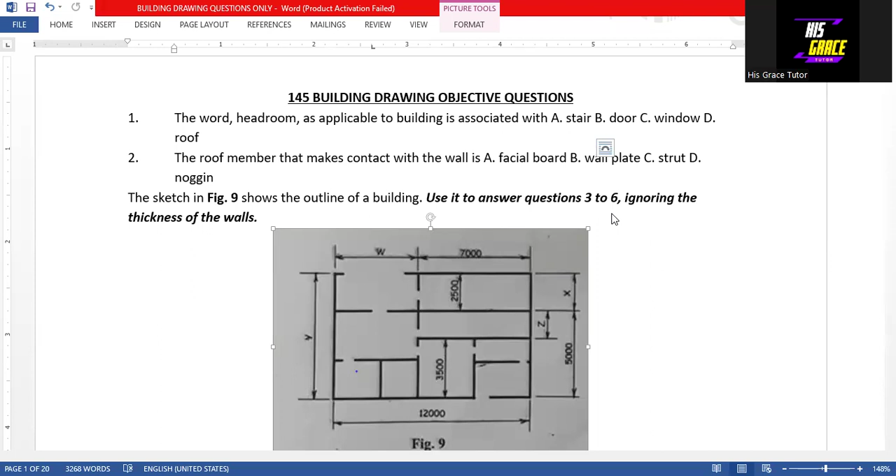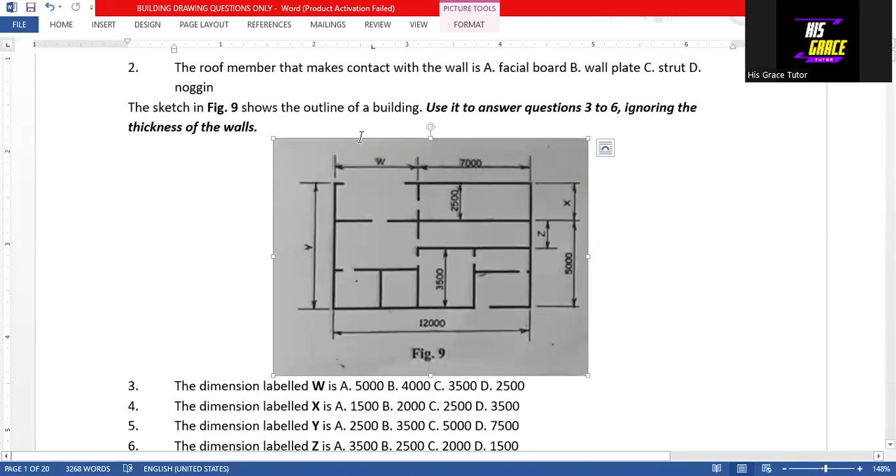We have to use this diagram to answer questions 3 to 6, as we are told the sketch in figure 9 shows the outline of a building. Use it to answer questions 3 to 6, and ignore the thickness of the wall. Let's start with question 3.

Question 3 says that dimension label W is... so we have W here, and the total length is 12,000, and from here to here is 7,000. If we subtract 7,000 from 12,000, the answer is 5,000. So option A is the answer to question 3.

Question 4 says that the dimension label X is... so here we have X. From here to here we have 5,000, and from here to here we have 2,500. So X is 2,500. Option C is the answer to question 4.

Question 5 says that the dimension label Y is... this is Y from here to here. If from here to here is 5,000, and for X it's 2,500, then dimension label Y is 7,500. So option D is the answer to question 5.

Question 6, dimension label Z is... this is Z from here to here. Looking at the total distance, as we have that Y is 7,500, for the distance from here to here we subtract: from here to here is 3,500 plus 2,500, which gives us 6,000. If we subtract 6,000 from 7,500, the total distance which is the length of Y, that gives us 1,500. So option D is the answer to question 6.

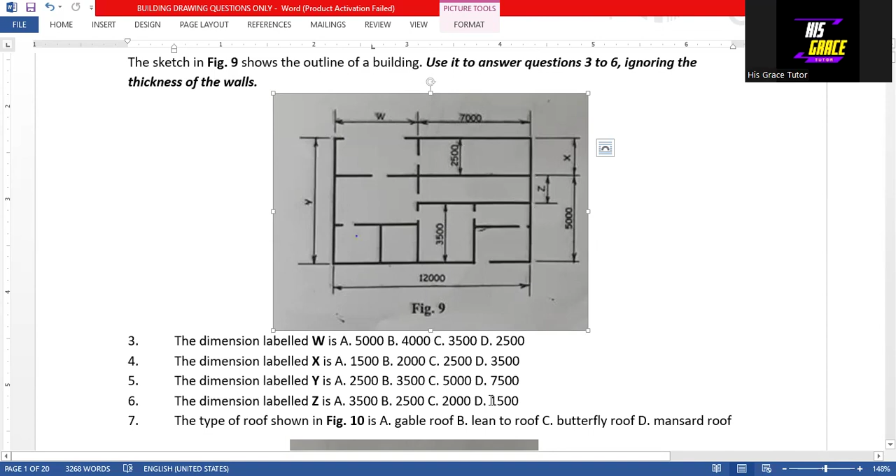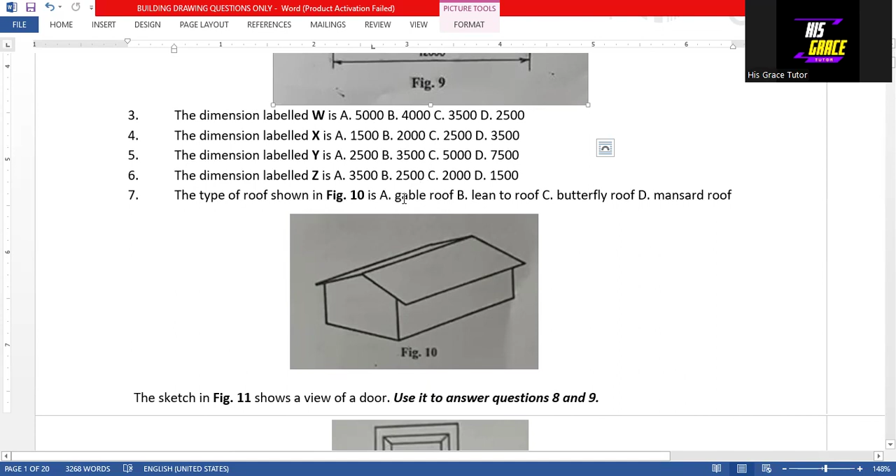Question 7 says that the type of roof shown in figure 10 is a gable roof. So option A is the answer to question 7. Gable roof is the answer. This is a gable roof, so option A is the answer to question 7.

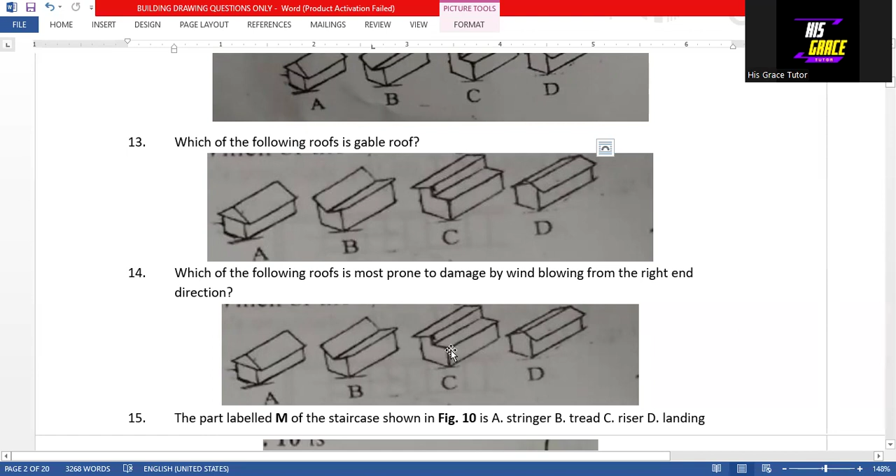Question 14 says that which of the following roofs is most prone to damage by wind blowing from the right end direction? So option C is the answer to the question. This particular roof will be affected by the wind blowing from the right direction.

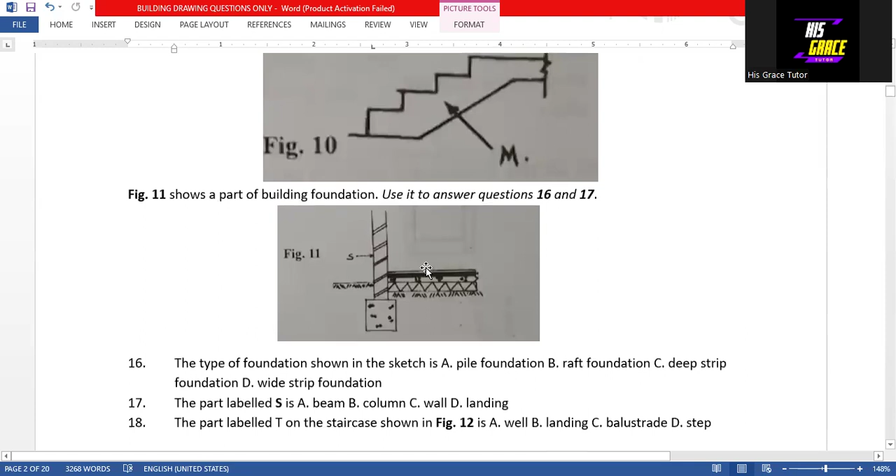Questions 16 to 17 use this diagram. Question 16 asks the type of foundation shown in the sketch, which is a deep strip foundation. That is option C.

Question 17: the part labeled S is a wall. That is option C, the answer to question 17.

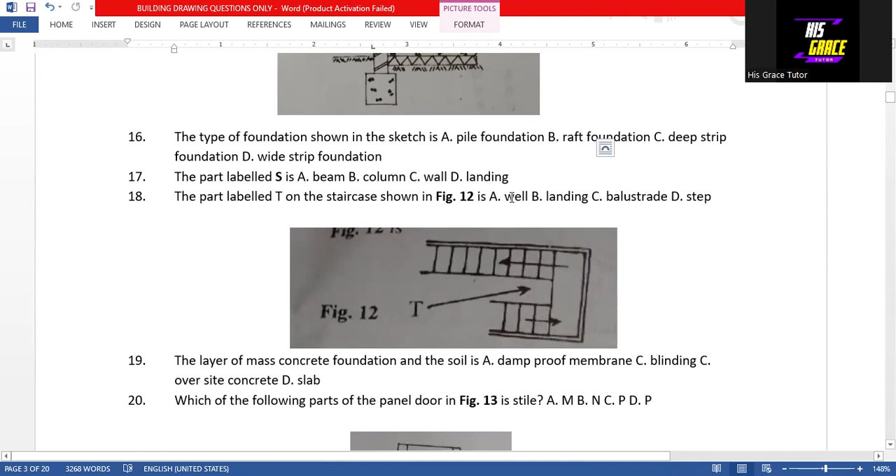Question 18: the part labeled T on the staircase shown in figure 12 is a well. That is option A, the answer to question 18. This part of the staircase is called a well.

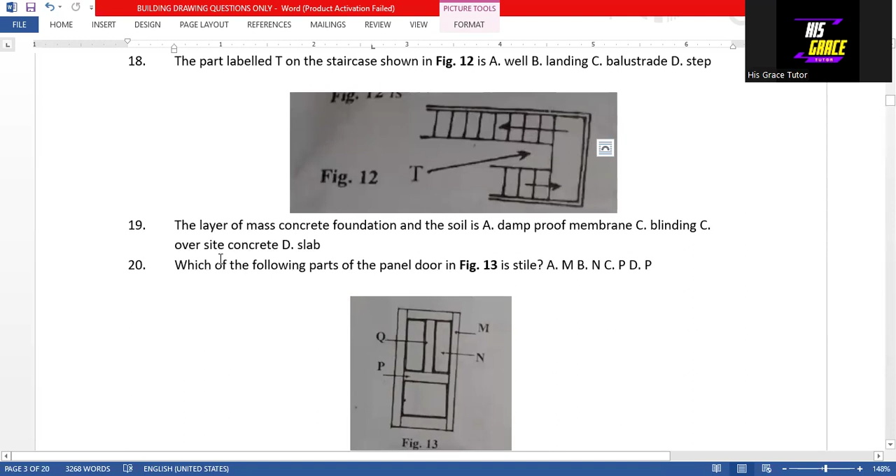Question 19: the layer of mass concrete for foundation and the soil is over site concrete. That is option C, the answer to question 19.

Question 20 asks which part of the panel door in figure 13 is a stile. Looking at this question, the answer is M is a stile. This part is known as a stile, part of a door.

Question 22: the material used to construct the door labeled K is wood. That is option A, the answer to question 22.

Question 23: in first angle orthographic projection, the view of the building in direction of RP is a front elevation. That is option C, the answer to question 23.

Question 24: which of the following symbols represents outcome? The answer is option A.

Question 25: the tool shown in figure 15 is called a trowel, or hand trowel. So option D is the answer to question 25.

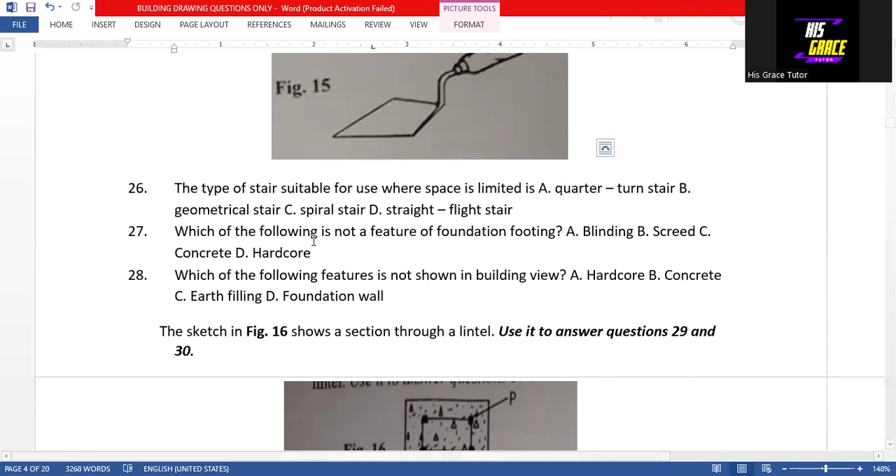Question 27 asks which of the following is not a feature of foundation footing. The answer is option B, screed.

Question 28 asks which of the following features is not shown in building view. The answer is option D, the foundation wall, which is not shown in building view.

Questions 29 to 30 use this diagram. Question 29: the purpose of the protruded rods labeled P is to provide reinforcement of the lintel. That is option B, the answer to question 29.

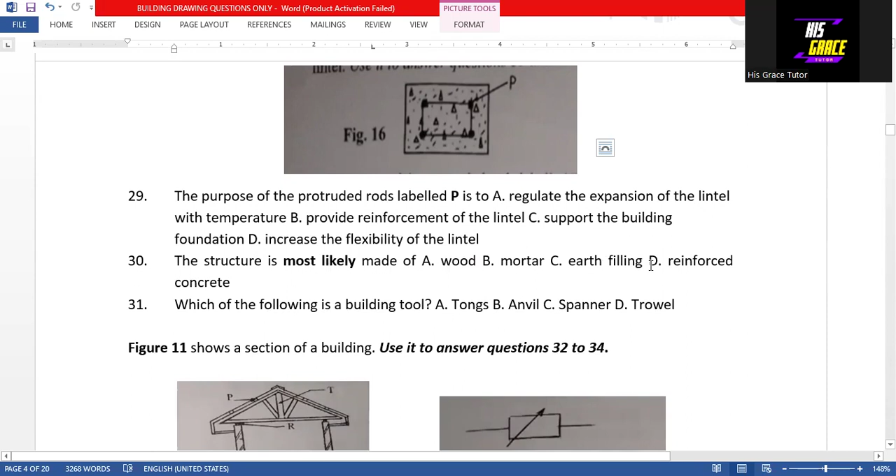Question 30: the structure is most likely made of reinforced concrete. That is option D, the answer to question 30.

Question 31 asks which of the following is a building tool. A building tool is a hand trowel or trowel. That is option D, the answer to question 31.

Questions 32 to 34 use this diagram. Question 32: the part labeled R is a wall plate. Option D is the answer to question 32.

Question 33: the part labeled T is a king post. So option C is the answer to question 33.

Question 34: the main function of the part labeled P is to support the roofing sheet. That is option C, the answer to question 34.

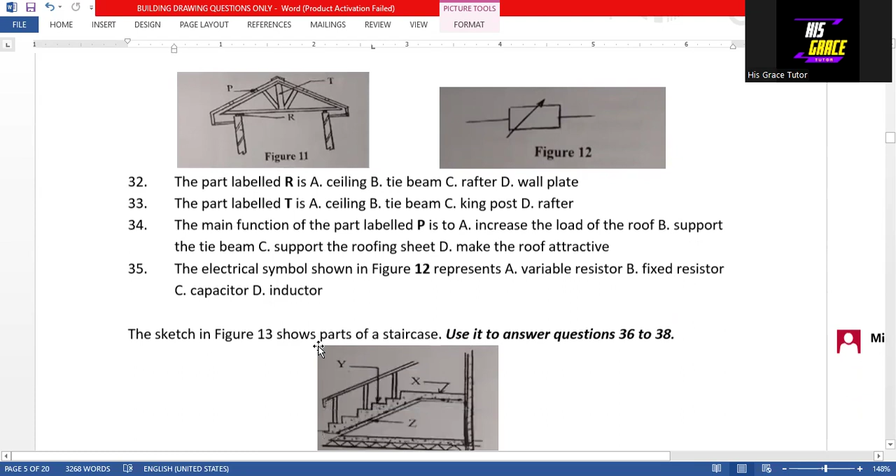Question 35: the electrical symbol shown in figure 12 is a variable resistor. Option A is the answer to question 35, referring to this diagram.

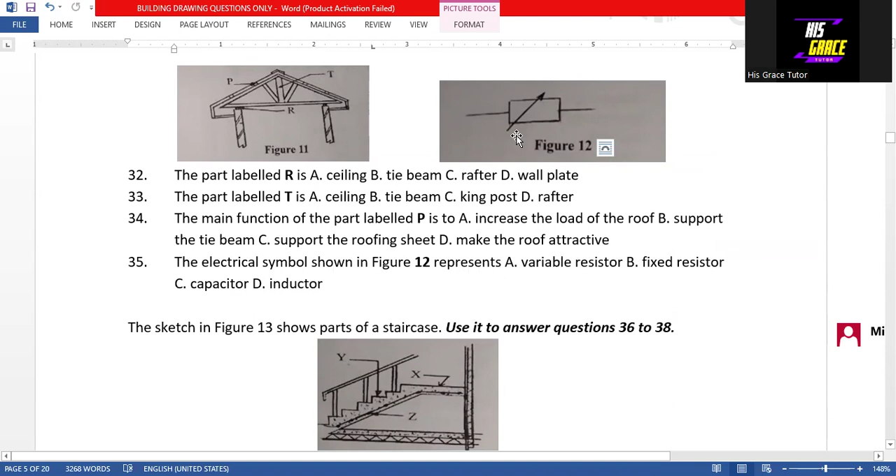Questions 36 to 38 use this diagram. Question 36: the part labeled X is a landing. That is option A, the answer to question 36.

Question 37, the part labeled Y is a tread. Option C is the answer to question 37.

Question 38, the function of the part labeled Z is to enhance tensile strength of the stair. So the answer is option B to question 38.

Question 39 asks which of the following symbols represents a single sink. The answer is option D to question 39.

Question 40 asks which of the following symbols conventionally represents a wall lamp. The answer is option C to question 40.

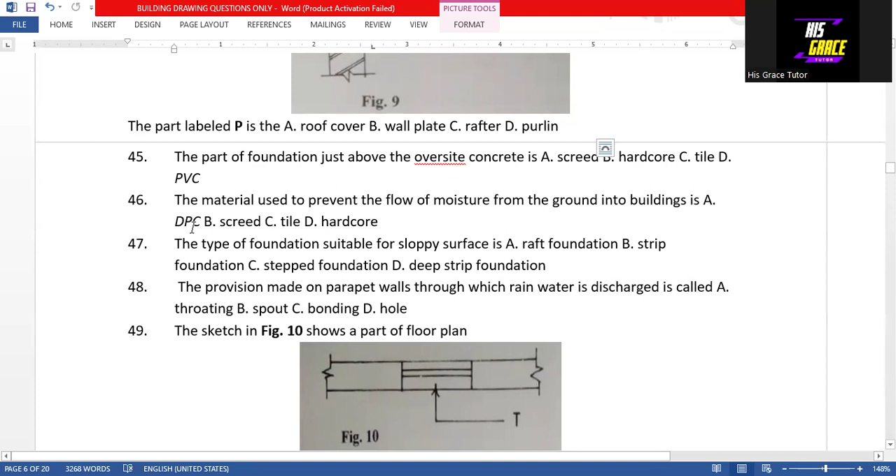Question 47, the type of foundation suitable for a sloping surface is a stepped foundation. Option C is the answer to question 47.

Question 48 says the provision made on parapet walls through which rainwater is discharged is called throating. Option A is the answer to question 48.

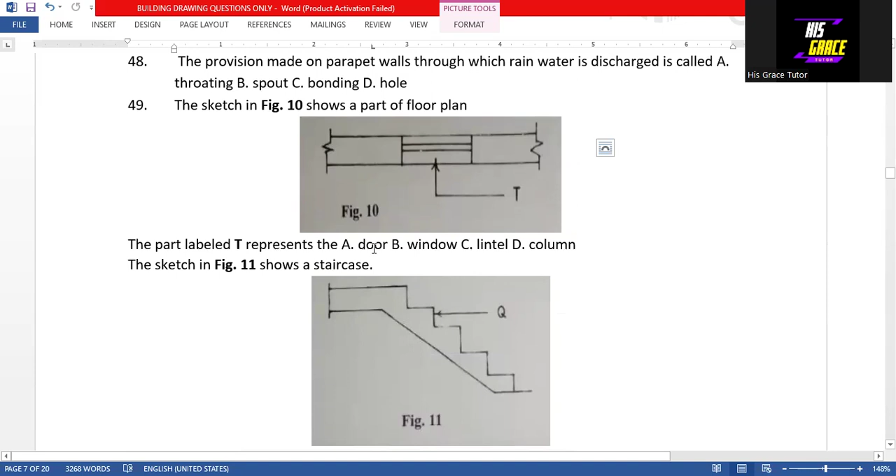Question 49, using this diagram, the part labeled T is a window. Option B is the answer to question 49.

Question 50, the part labeled Q is a riser. Option D is the answer to question 50.

Questions 51 and 52 use this diagram. Question 51 says the type of stair shown on the sketch is a straight flight stair. Option D is the answer to question 51.

Question 52, the part labeled C is a handrail. Option C is the answer to question 52.

Question 53 asks which of the following building material symbols represents hardcore. The answer is option A. We have done something like this before.

Question 55, the type of roof on the building is a gable roof. Option C is also the answer to question 55.

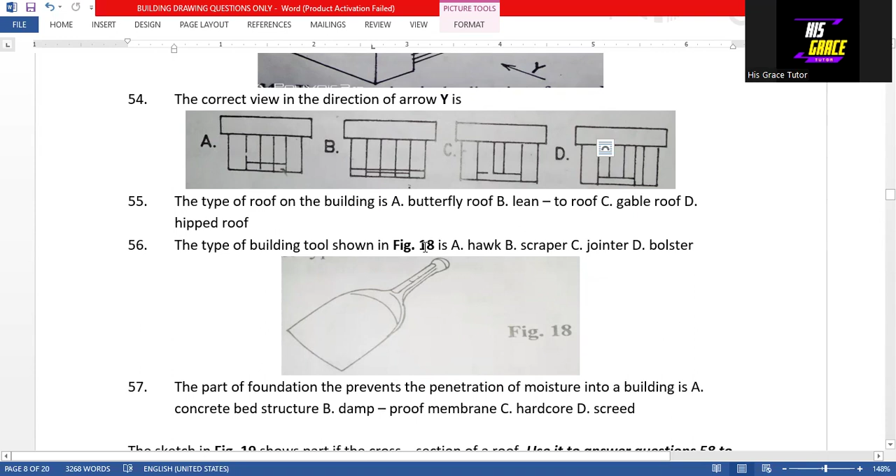Question 56, the type of building tool shown in figure 18 is a bolster. Option D is the answer to question 56.

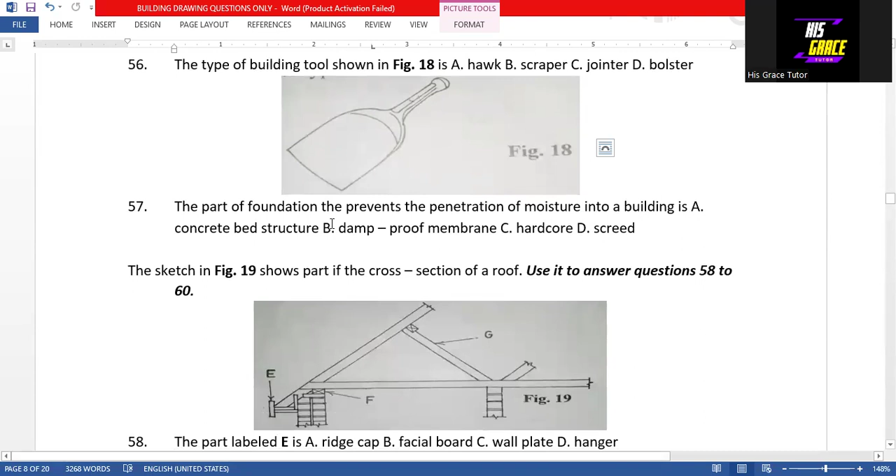Question 57, the part of the foundation that prevents penetration of moisture into a building is a damp-proof membrane, or we call it damp-proof course. Option B is the answer to question 57.

We use this diagram to answer questions 58 to 60. Question 58, the part labeled E is a fascia board, option B. Question 59, the part labeled G is a strut.

Option A is the answer to question 59. Question 60, the part labeled F is a wall plate. Option D is the answer to question 60.

We use this diagram to answer questions 61 and 62. Question 61 says the part labeled Q in the figure is the mullion. Option C is the answer to question 61.

Question 62, the part labeled T in the figure is a stile. Option D is the answer to question 62.

Question 63, which of the following tools is classified under impelling tools? The answer is option C, chisel is an impelling tool. We use it to shape the wood.

We have to make use of this diagram to answer questions 64 to 65. Question 64 asks which labeled part is a ridge. F is the answer, that's option D. Question 65 says the part labeled K is a collar, that is option C.

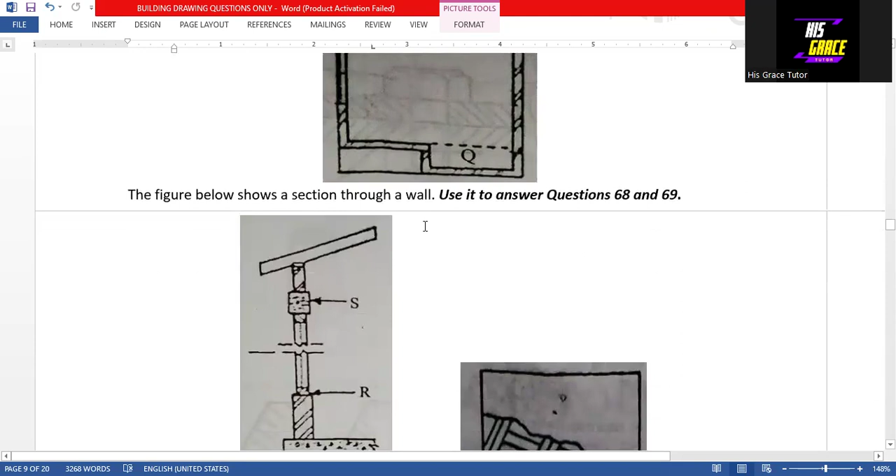Question 70 says that the conventional symbol shown above represents earth. Option C is the answer to question 70.

Question 71, how many flights has the staircase shown below? Looking at this, it's just a one flight staircase, so option A is the answer to question 71.

Question 72, which of the following is not a type of door? The answer is jamb, that is option C is the answer to question 72.

Question 73, the electrical symbol shown above is a signal lamp. That is option B is the answer to question 73.

We have to use this diagram to answer questions 74 to 76. Question 74 says the part labeled K is a balustrade, so the answer is option B.

Question 75, the part labeled P is made of wood. That's option C, the answer to question 75.

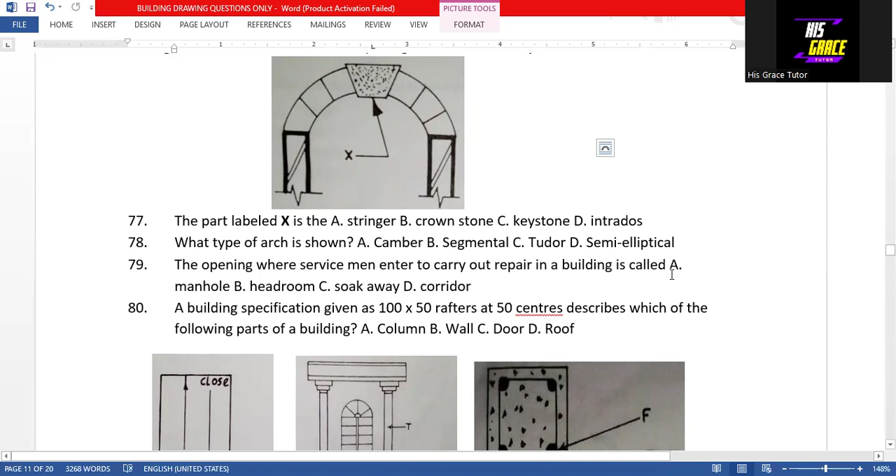Question 80, a building specification given as 100 by 50 rafters at 50 centers describes which part of the building? That is roof, so option D is the answer to question 80.

Question 81 says the type of door which is closed and opened vertically as shown in figure 18 is a roller shutter door. That is option A is the answer to question 81.

We make use of this diagram, figure 19, to answer questions 82 to 83. Question 82, the type of door shown is a flush door. Option D is the answer to that question.

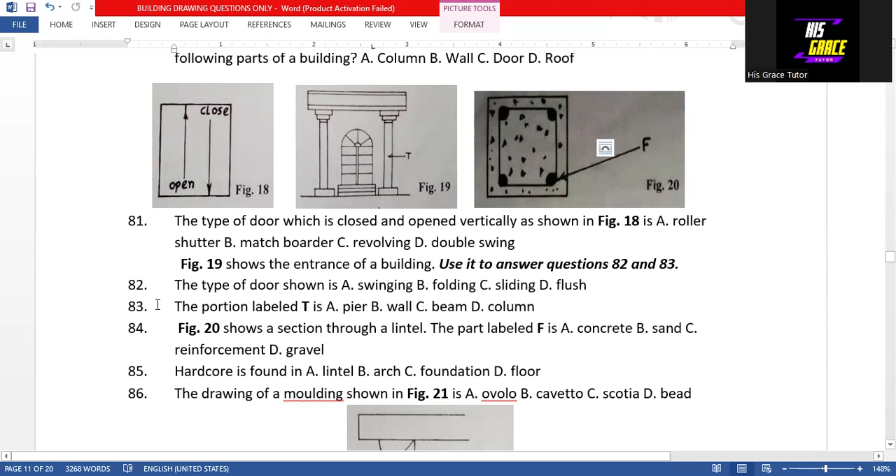Question 83, the portion labeled T is a column. That is option D is the answer to question 83.

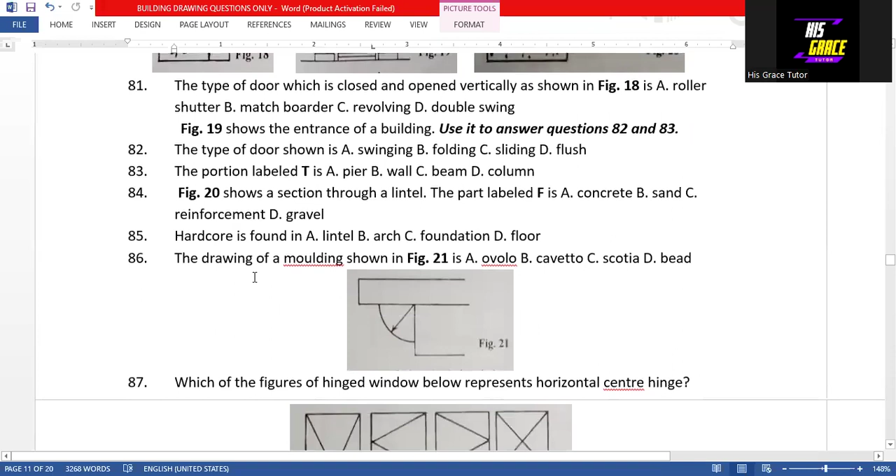Question 84 uses this diagram, figure 20, which shows a section through a lintel. The part labeled F is a reinforcement. That is option C is the answer to question 84.

Question 85, hardcore is found in the floor. Looking at the specifications of the building drawing, it's part of the floor.

Question 86, the drawing of a molding shown in figure 21 is as follows.

Option A is the answer to question 86.

Question 87: Which of the figures of hinge window below represent horizontal center hinge? Option D is the answer to question 87.

We make use of this diagram to answer questions 88 to 90. Question 88 says the part labeled V is a soffit board, that's option A. Question 89 asks what the roof members S and T respectively are - they are the ridge board and ceiling joist, that is option B, answer to question 89.

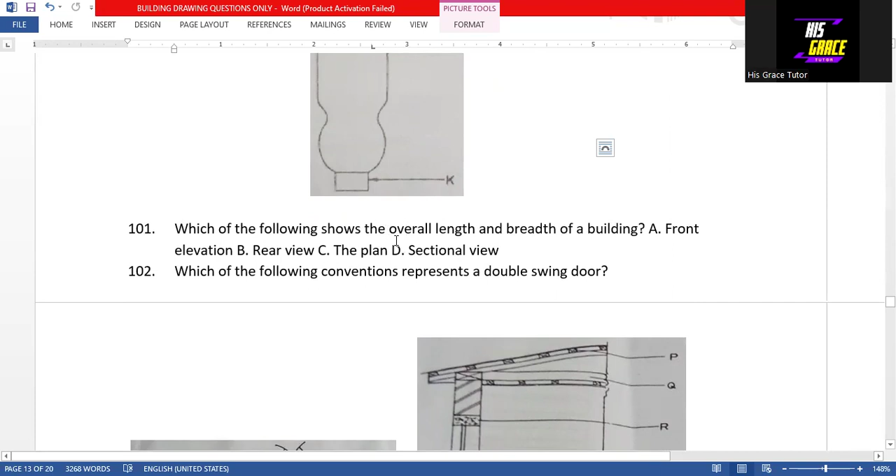Question 101: Which of the following shows the overall length and breadth of a building? That is the building plan, option C is the answer to question 101.

Question 102: Which of the following conventions represent a double swing door? That is option A is the answer to that question.

We make use of this diagram to answer questions 103 to 106. Question 103: the part labeled P shows a purlin. That is option B is the answer to question 103.

Question 104: the portion labeled R is located directly on top of a window, that's a lintel. Option C is the answer to question 104.

Question 105: the portion S is a floor finish. That is option B is the answer to that question.

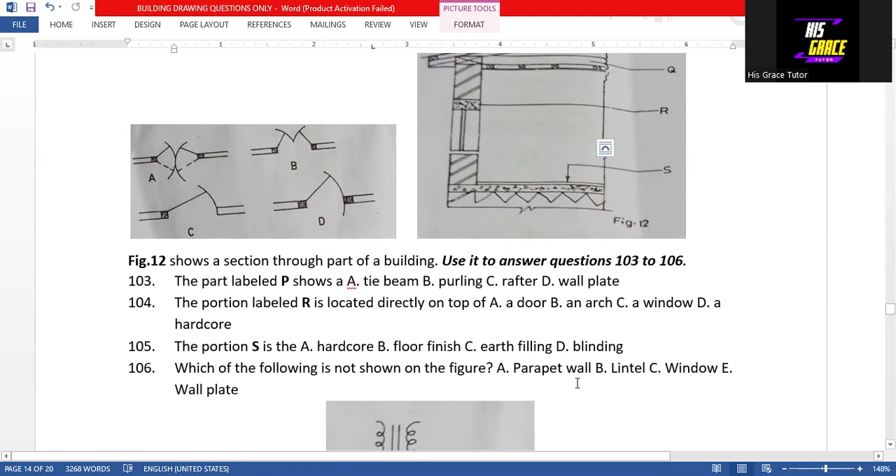Question 106: Which of the following is not shown on the figure? Looking at what we have here, parapet wall is not shown on the figure. Option A is the answer to question 106.

Question 108: Which of the following parts of a building has both tread and riser? That is staircase. Option C is the answer to question 108.

Question 109: a door made of steel is represented by which of the following symbols? The answer to question 109 is option D.

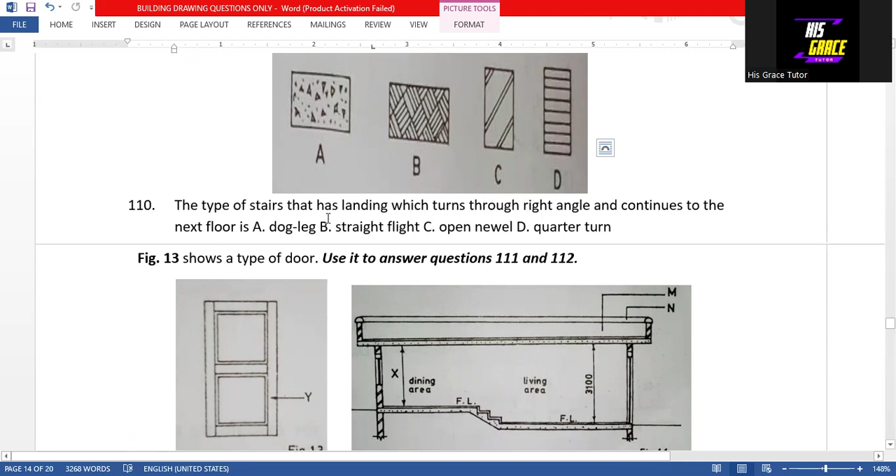Question 110: the type of stairs that has a landing which turns through a right angle and continues to the next floor. The answer is option A, that is dog leg stairs. We are making use of this diagram.

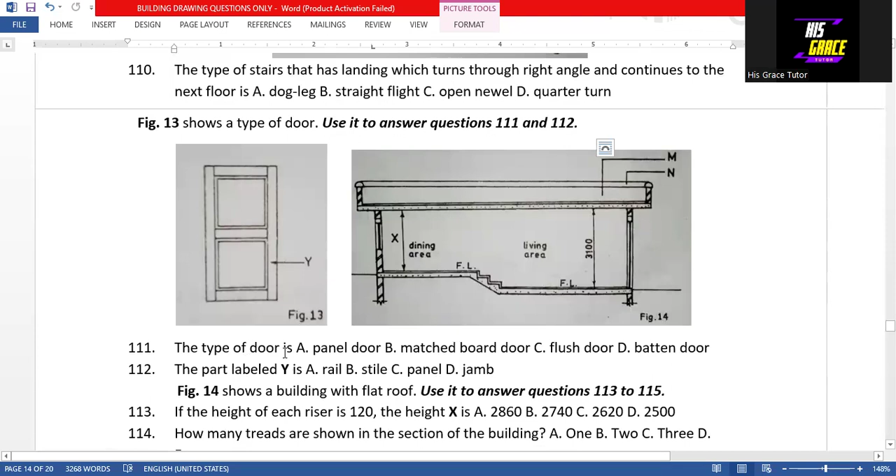To answer question 111 to 112: the type of door shown is a panel door, that is option A. The part labeled Y is a stile, that is option B, the answer to question 112.

We use this diagram to answer question 113 to 115. Question 113: if the height of each riser is 120, the height X is found by multiplying 3 risers times 120, giving 360. Then we subtract 360 from 3,100, giving 2,740. That makes the answer to question 113 option B.

Then, how many treads are shown in the section of the building? We have 2 treads, that is the surface here and the surface here. So the answer is option B to question 114.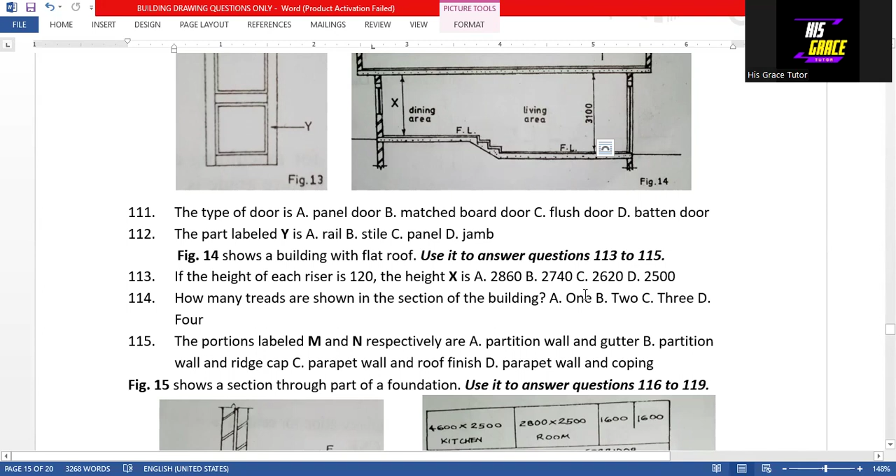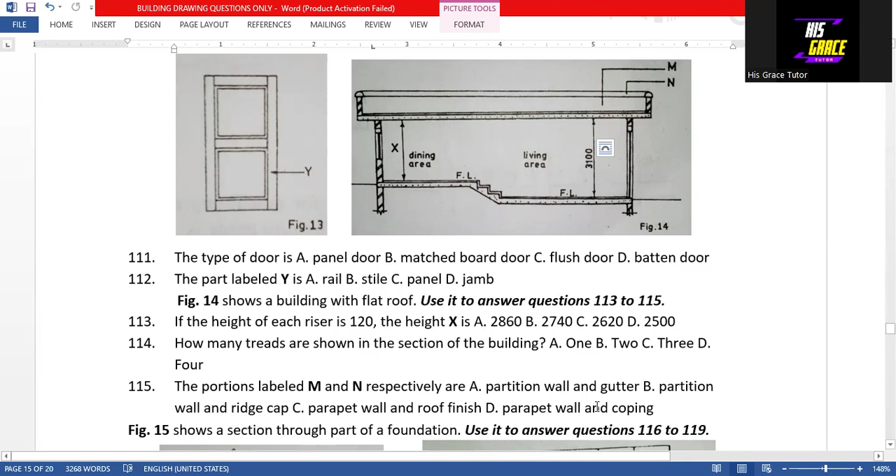Question 115 says the portions labeled M and N respectively are: M is parapet wall, while N is coping. So option D is the answer to question 115.

We are making use of this diagram to answer question 116 to 119. Question 116: the type of wall shown is a cavity wall, that's option C. The part labeled F is a skirt, that is option A.

The part labeled G, question 118, is DPC, damp proof course.

Question 119, in figure 16: if the block is 225, the length Y is found by summing the lengths from here to here.

So we sum 4,600 plus 2,800 plus 1,600 plus 1,600, and that amounts to option A, 10,600, the answer to question 119.

Then on a building drawing, FL is used to represent floor line or floor level.

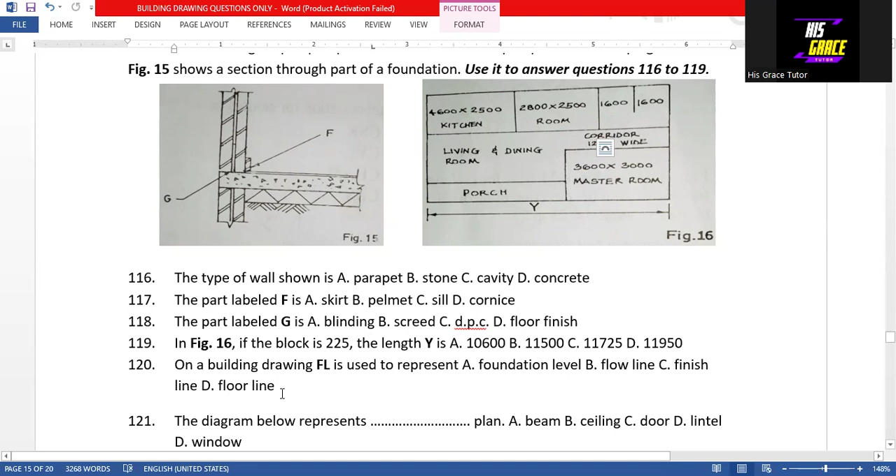Question 121 says the diagram below represents a dash plan. It represents a window plan.

Question 122: the recommended size of door for a toilet opening is 750.

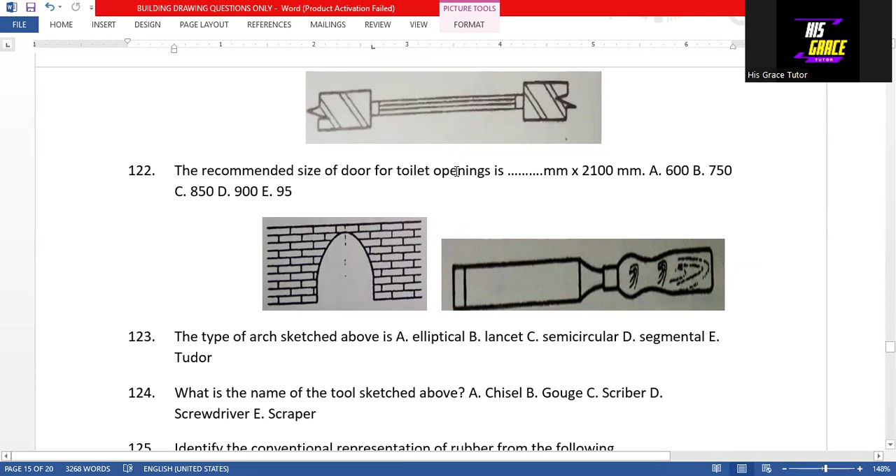Question 123: the type of arch sketched above is a lancet arc, that is option B, the answer to question 123.

Question 124: what's the name of the tool sketched above? The answer is a chisel, option A.

Question 125: identify the conventional representation of rubber from the following. The answer is option E.

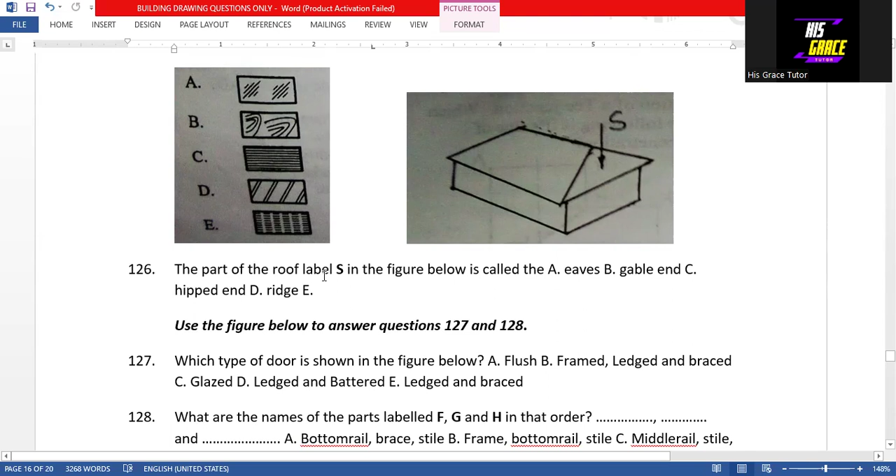Question 126: the part of the roof labeled S is hip end, that is option C, the answer to question 126.

Question 127: which type of door is shown in the figure below? The type of door shown is option B, a framed, ledged, and braced door.

Question 128: what are the names of the parts labeled F, G, and H? The answer is option A. F is bottom rail, G is brace, and H is stile. Option A is the answer to question 128.

Question 129 asks which symbol represents glass. Using this diagram, this represents glass, so the answer is option B.

Question 130 asks about the roof shown in the figure below. This roof is the lean-to roof, so option B is the answer to question 130.

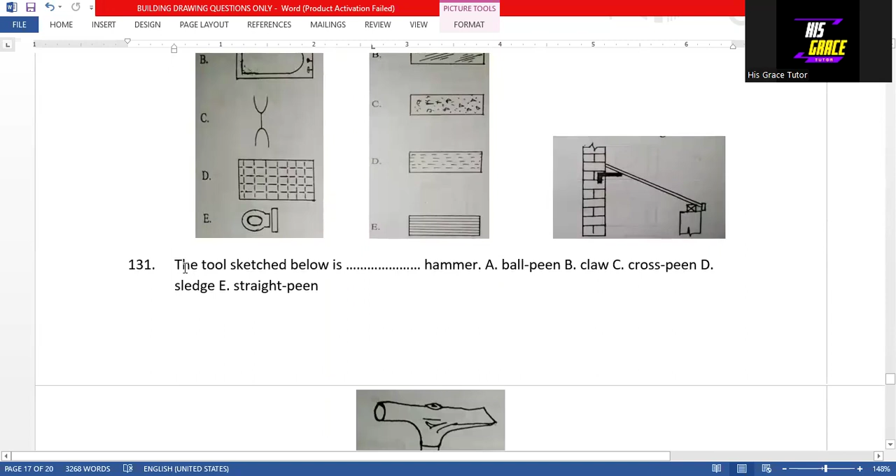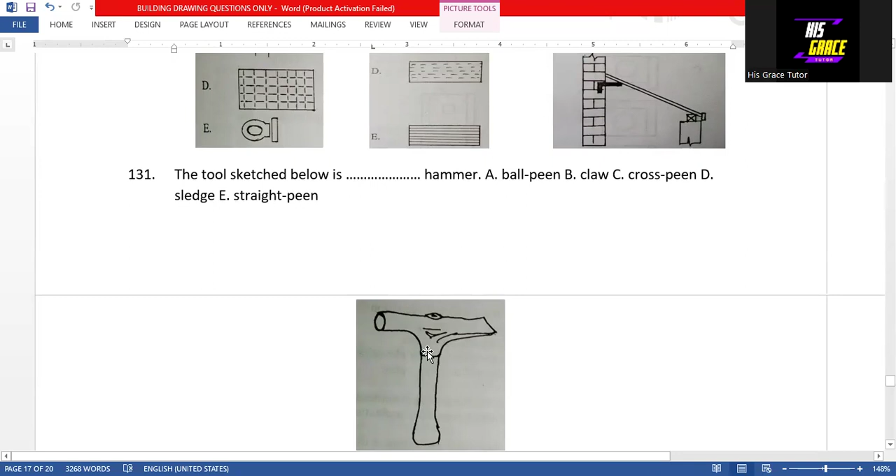Question 131: the tool sketched below is a cross-peen hammer. So option C is the answer for question 131.

We make use of this diagram to answer questions 132 to 134. Question 132 asks which of the following letters represents the roofing sheet. The answer is option D, letter M, representing the roofing sheet.

Question 133: the wall plate is represented by letter O, so option A is the answer to question 133.

Question 134 asks which symbol represents water. Option D is the answer to question 134.

Question 135: the figure shown above can be identified as a marking gauge. Option A is the answer to question 135.

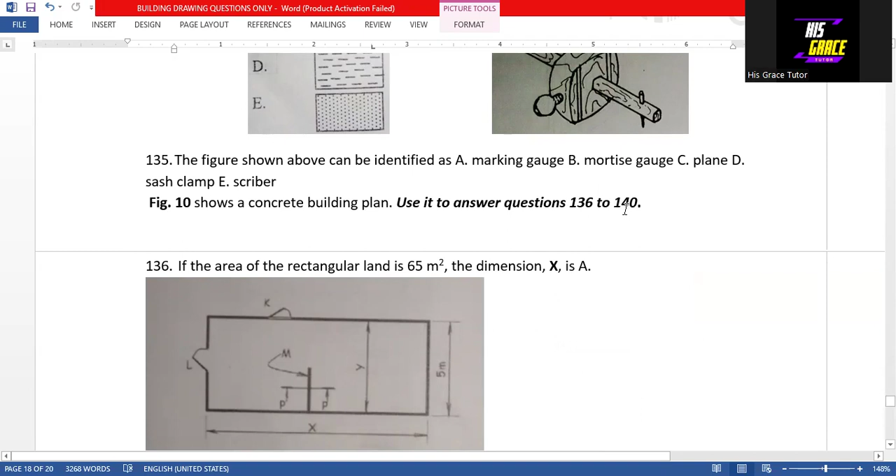We use this diagram to answer questions 136 to 140. Question 136 asks that if the area of the rectangular land is 65 meters square, what is dimension X? This is dimension X here.

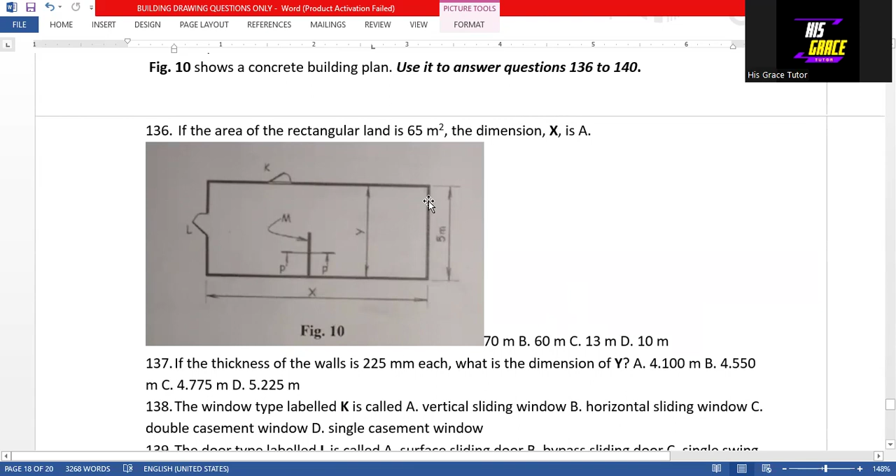If the area is 65 meters square and the width is 5 meters, then length X will be 13 meters, since 65 divided by 5 gives 13. So option C is the answer to question 136.

Question 137 asks that if the thickness of the wall is 225 millimeters each, what is dimension Y?

Here we have 225 millimeters, times 2. Let me use my calculator. 225 times 2 gives 450. Then we subtract 450 from 5 meters.

If we divide 450 by 1,000 to convert it to meters, that gives us 0.45. Then subtracting, 5 minus 0.45 gives us 4.55. So the answer is option B for that question.

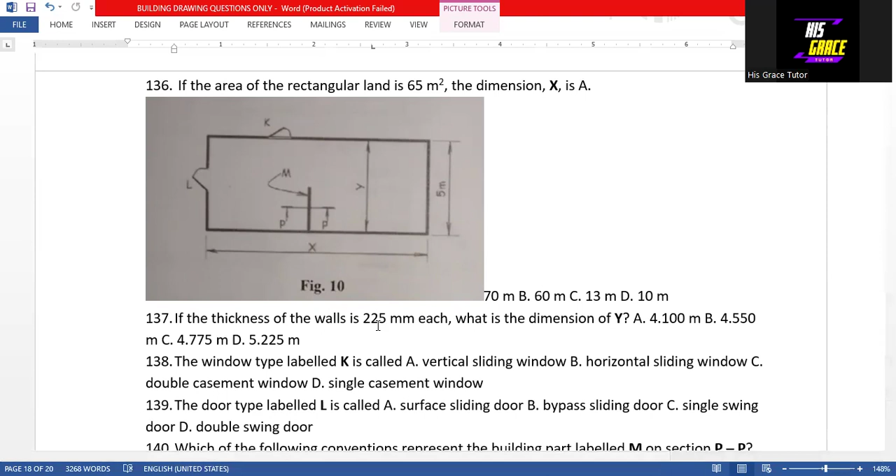So distance Y is 4.55. To summarize: we multiply 225 by 2 for the thickness of the wall, giving 450. We divide 450 by 1,000 to convert it to meters, then subtract 0.45 from 5, which gives 4.55. So the answer is 4.55 for length Y.

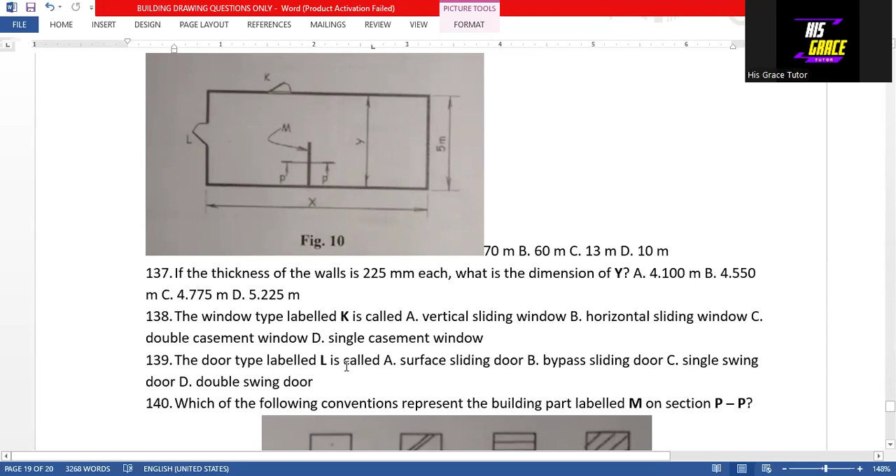Question 138: the window type labeled K is a single casement window, that's option D. Question 139: the door type labeled L is a single swing door.

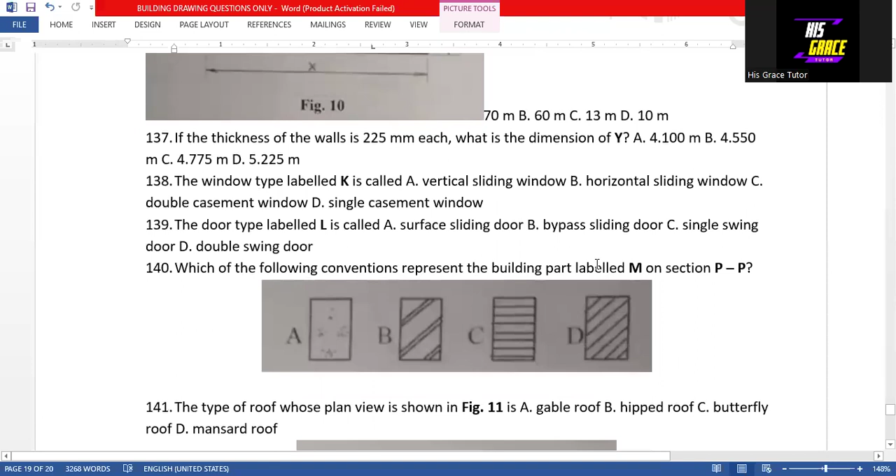That is option C is the answer to question 139. Question 140 asks which convention represents the building part labeled M on section PP. Building part label M is a wall, so the answer is option B.

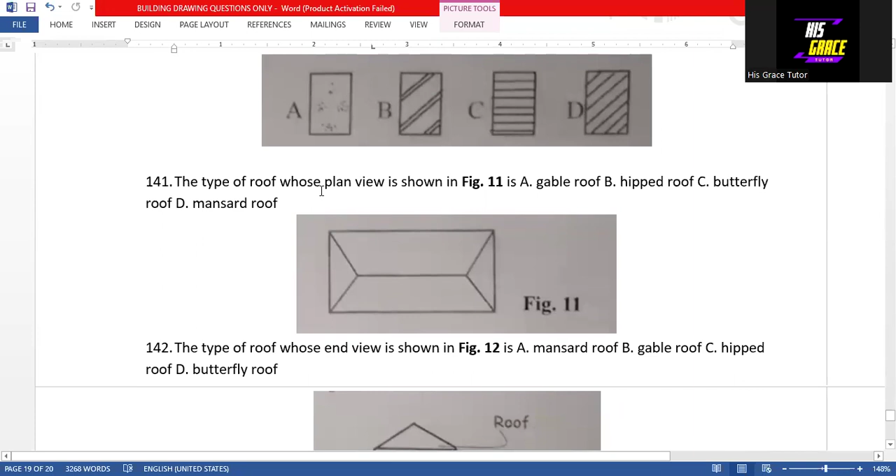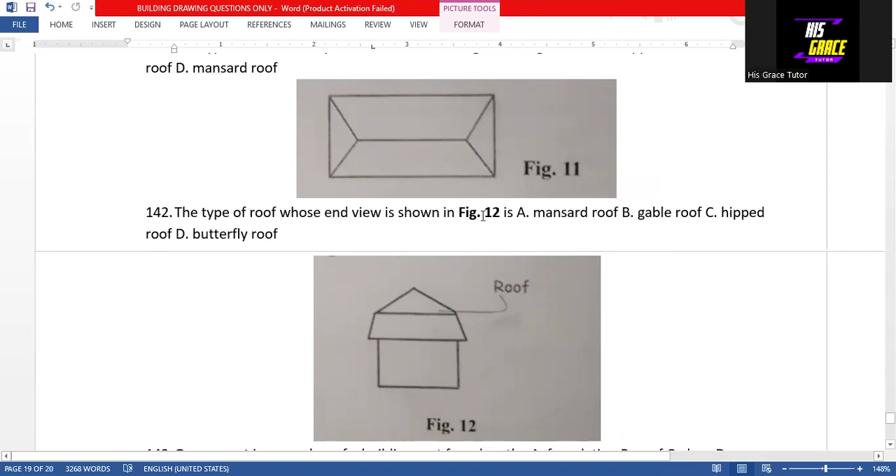Question 141: the type of roof whose plan is shown is a hip roof, option B is the answer. Question 142: the type of roof whose end view is shown is a mansard roof, option A is the answer.

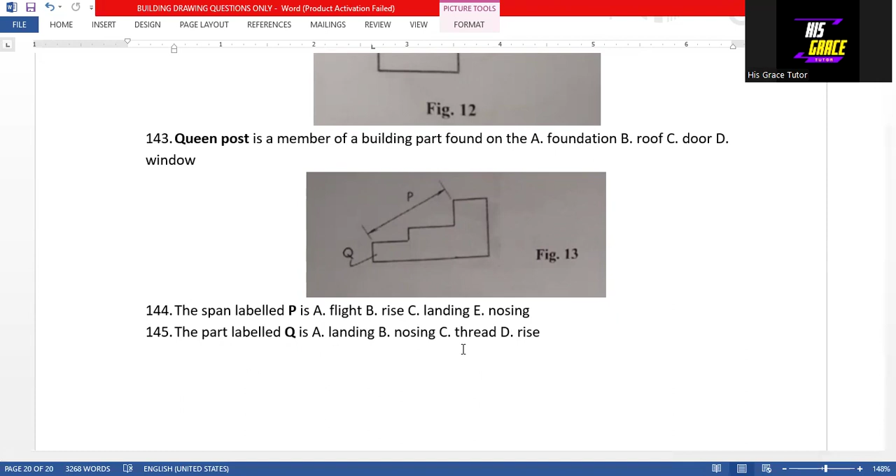As simple as I've done it here, all you have to do is practice. When you practice this, you become a master at it. Thank you, keep on practicing and God bless you.